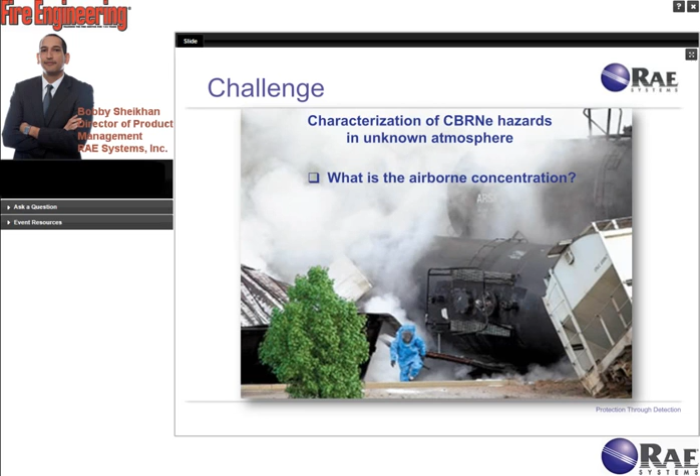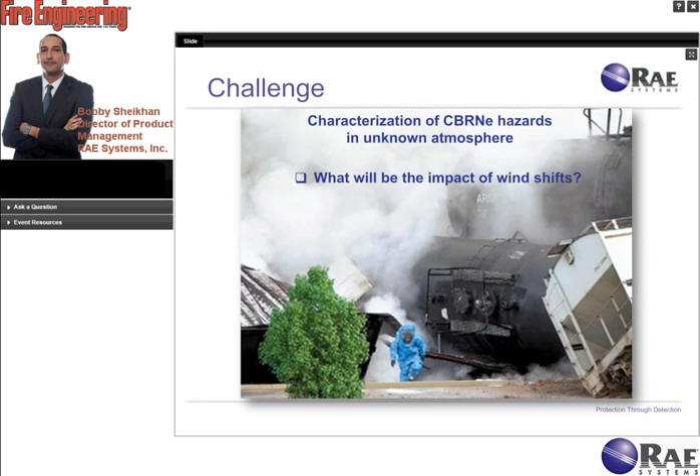So specifically, if we're dealing with, say, a chemical threat, the rate at which the hazard is being released, as well as the airborne concentration in the air, coupled with any sort of meteorological information such as wind speed and wind direction, are really valuable input points to have in order to be able to calculate the total impact that this plume can have and start to answer some of the other difficult questions such as, where is this actual threat heading from here on? So looking ahead, what are we really dealing with here?

Now, in order to coordinate an effective response plan, really some of the decisions that need to be made are how best to utilize the typically limited resources that might be available. So in other words, where do we actually send our folks? How do we suit them up in terms of personal protective equipment? What type of gas detection or radiation identification type equipment do we want to deploy?

So an accurate characterization of the actual hazards in the atmosphere is really required in order to determine such things as what is the best location to send responders, how to gear them up and how to equip them.

And really a key, what can be a big challenge if it's a large-scale enough incident, is how do you deal with the tasks we've talked about so far, as well as attempting to coordinate merging with mutual aid response type teams. So that can include the sharing and integration of gas, radiation or chemical warfare sensing and detection monitors, as well as just the logistics of how do you coordinate that type of response.

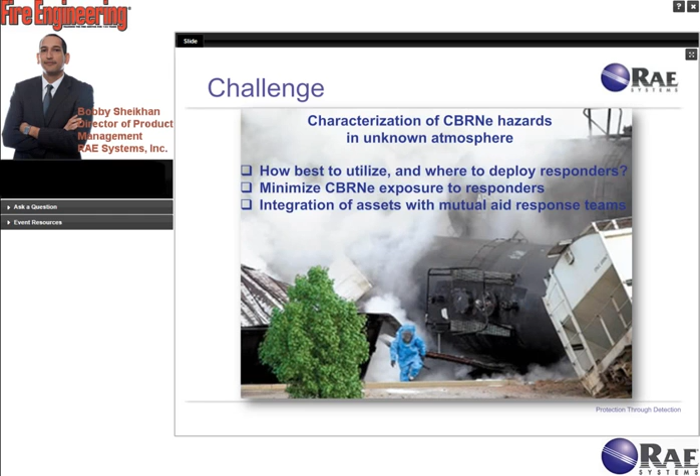And ultimately, all these efforts and questions are geared towards the primary mission goals of, one, stopping the threat, and protecting the public and the community from impact. So as part of the protection effort, decisions such as who potentially needs to be sheltered in place, or which roads may need to be closed, are things that must be decided.

And such difficult decisions do have impact on the effectiveness of the response strategy and certainly can pose potential liability both for the response team themselves and the public, in terms of obviously health dangers, but as well as any sort of liability issues or monetary considerations that can come about as a result of over-responding, if you will. So in other words, how do we know how large of a population to shelter in place, or which areas, which businesses are going to be impacted? These all add to the complexity of the response effort.

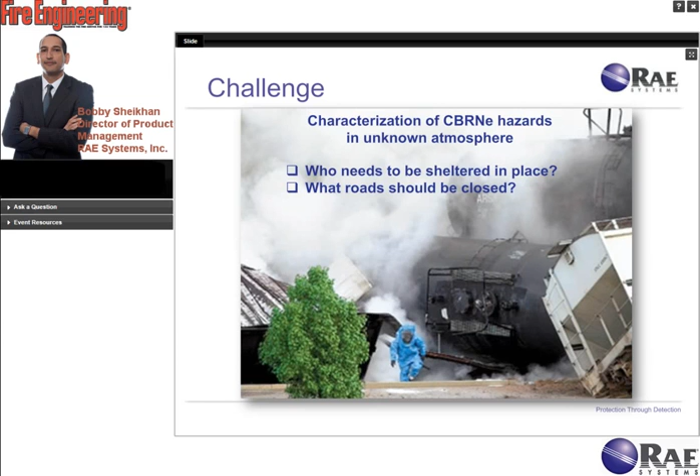So if we look at the more traditional response plan, specifically the detection tools we might use to characterize what we're actually dealing with in the atmosphere, typically you would have a pair of responders that you would send into what we'll call the hot zone with a backup team, and depending on the size of the event, it can certainly be larger than that.

But it was basically based on the premise of equipping one or several individuals with monitoring equipment, with some sort of communication device, to be able to start to get a view of what's going on over a fairly large area. And there are some inherent shortcomings with this type of approach, and we've listed a few of them here, starting with the ability to identify the threat that we're dealing with.

So, these days a lot of monitors have become quite sophisticated in terms of the ability to equip them with a variety of sensors, which has its own potential drawbacks to consider. But ultimately, there is a limitation to how much we can put in one particular box. So that, coupled with the fact that we have a limited number of folks that we could send out to perform sampling, and sampling that's really, if you look at it, a snapshot, right? So at that particular moment in time, at that particular location.

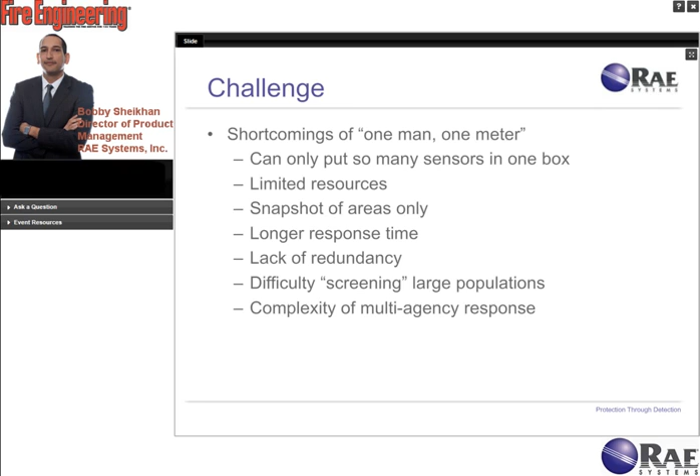So in terms of looking at the solution, really the integration of what have become fairly robust, field-proven wireless networks with both portable and what I would call transportable detection monitors, coupled with sophisticated software running on advanced computers these days, really allows you more of a system approach where a network of sensors provides real-time data over a wide area. So again, as opposed to getting snapshots of particular locations, we can now really begin to look in real time at multiple locations. And there are some inherent benefits of being able to do that.

What we can start to do now is, with the ability to couple these sensors with GPS readings, as an example, we can start to overlay that information on a local map and/or an image of a facility potentially. So what this really allows us to do is get a look into the hot zone or the threat zone remotely, and that provides some enhancements in terms of looking at multiple locations, providing a second set of eyes to the folks that are actually within that threat zone, coupled with other capabilities when we start talking about decision support software.

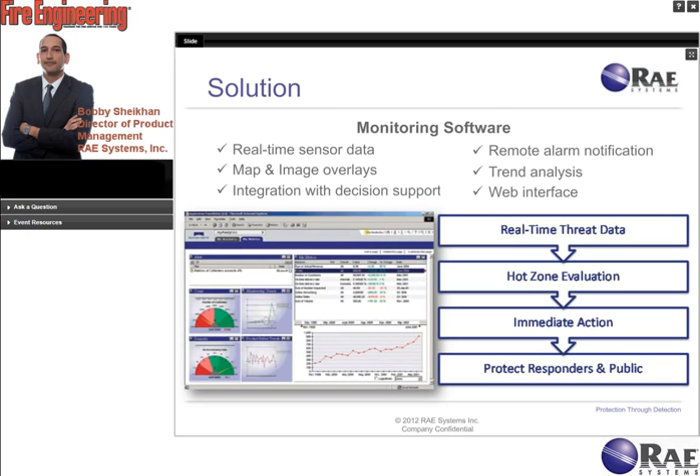So if we start to look at the different major components of this type of system, on the last slide we really discussed more the software side or the command host side where we bring in all this information. If we look at the detector side or the monitoring sensor side of the system, again, that's one of the benefits of being able to use a system approach where we network these different types of technologies together. So some examples include handheld monitors that can help us detect toxic industrial chemicals, chemical warfare agents, radiation, and we're not just limited to sensors for the detection of threats that may be airborne.

What we can do now is really start to couple this detection information with other sensing technology, such as meteorological, again, to give us things like wind speed, wind direction, things like physiological, where we can equip the responders with sensors that will measure their heart rate, heartbeat, posture, and things like that. Coupled with man-down sensors within the monitors, it really does provide an increased safety net or a second layer of safety at the command center in terms of what's really going on with the responders and the sensors within the threat area that they are covering.

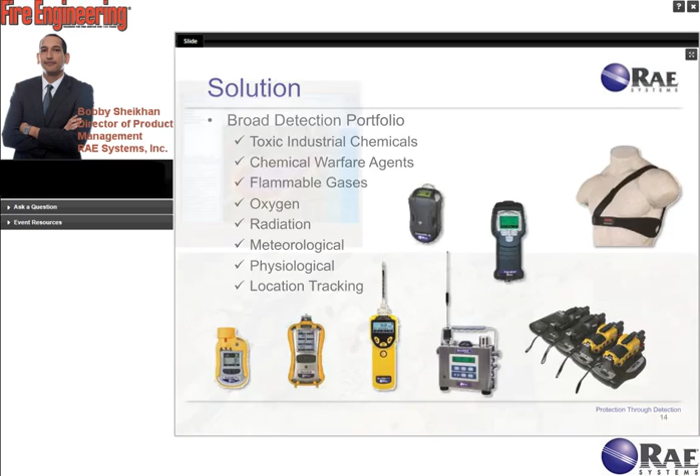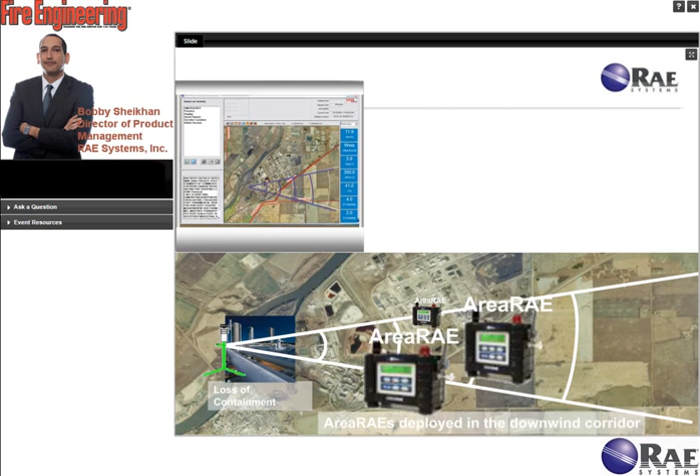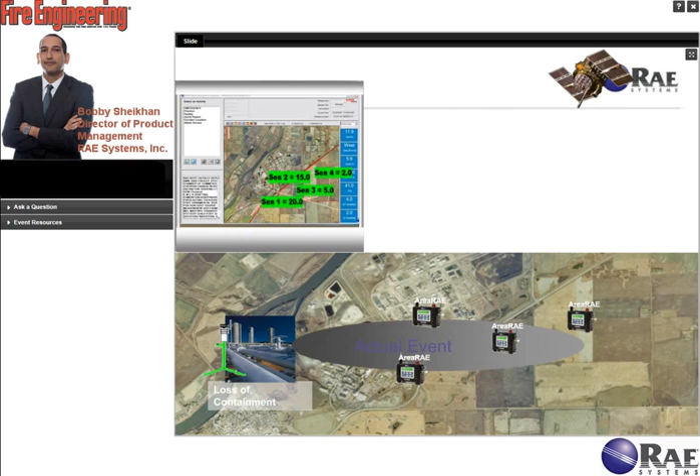Now, if we were to take a look at what a deployment scenario might look like, and again, really, if you look at a lot of the traditional hazmat response type tools, they are appropriate for what we might tag more as CBRNE or terrorist type incidents, because ultimately a lot of the threats remain the same and the response tools will be the same. So in this case, we're looking at some sort of loss of containment. Again, that could be both accidental or ill-intended, and we have some sort of chemical release into the atmosphere. And so one of the first steps was really to deploy the portable MET station, and that gives us a general area that could be affected.

And now what we can do is deploy a set of wireless monitors into that area. And because it is measured in real time, it is basically going to do an advanced back calculation and give us a fairly accurate assessment of how much of this particular threat had to have been released initially to generate that type of plume. And we get a nice color-coded plume over a mapping area, including some facilities that may be at risk. And this can be both real-time and forward-looking in terms of where this is heading.

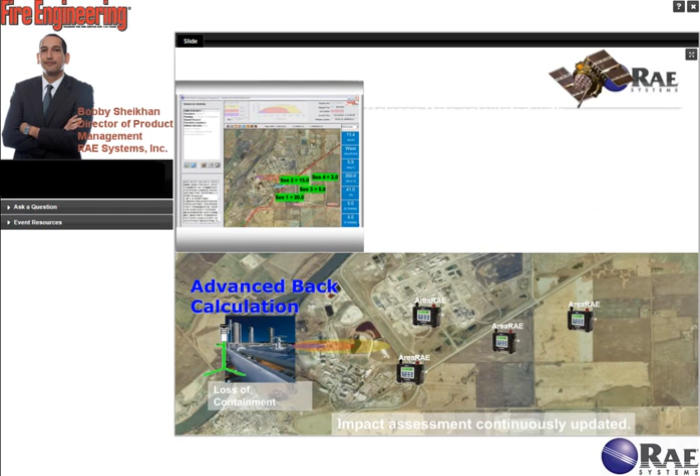And obviously, as the event transpires, you can see the plume starts to get smaller because, let's say in this case, we were able to contain the threat. And because the monitors are measuring that all in real time, it's going to continuously correct the plume. So again, going back to one of the benefits we discussed, which is the ability to take these real-time sensor readings and feed them into other systems, as opposed to a traditional plume model, at the end of the day this is still a model, but the difference is that we are measuring in real time and constantly doing a check and saying, do these readings make sense with what the model is actually predicting?

And then if we were to drill down one layer further, just to give you a sampling of what that might look like. Again, in this case, what we're looking at is a plume that's been generated. To the right there, we have our real-time weather and sensor data information. At the top pane, it's displaying to us what the chemical threat of concern is. In this case, we're dealing with chlorine.

It includes a graph of the release in terms of both height and distance. And down at the bottom left, we're looking at potential impact zones. So that could be homes, schools, different residential and commercial buildings that are within that plume. And because all the information is within one area, now you can really start to generate automated reports. You can bring up graphs showing indoor versus outdoor concentration for a particular building.

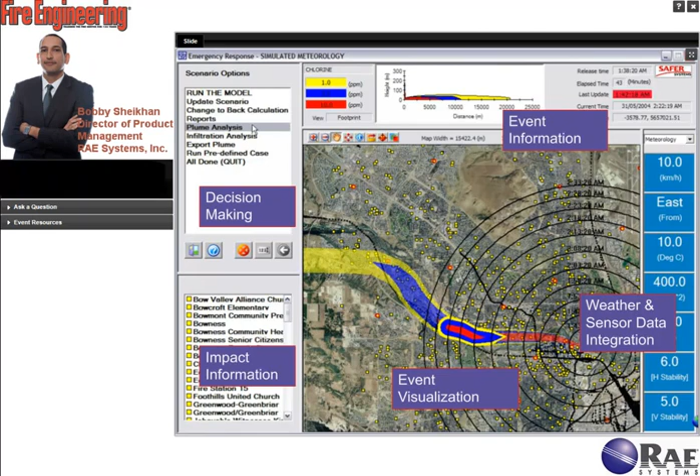Taking a look, just to give you a sampling of some of the specific applications where we've seen wireless sensing detection used over the years. Obviously, we talked about general hazmat type response. That could be something as typical as a tanker rolled over on the highway, to more involved events. It can certainly be public venue protection. I gave you some samples earlier where it could be a lot of sporting type events. It could be inaugurations for political parties. Essentially anytime you can have a large gathering indoors or outdoors of folks.

These types of systems certainly have a lot of benefits in terms of rapid deployment, the ability to move them fairly easily, and they can be a valuable tool in terms of planning protection for these types of events. And because of a lot of the similar characteristics, they can also be used in more permanent type deployments. So that could be at ports, or at military facilities or installations where the system is just left up and running, say, as a fence line type monitoring system.

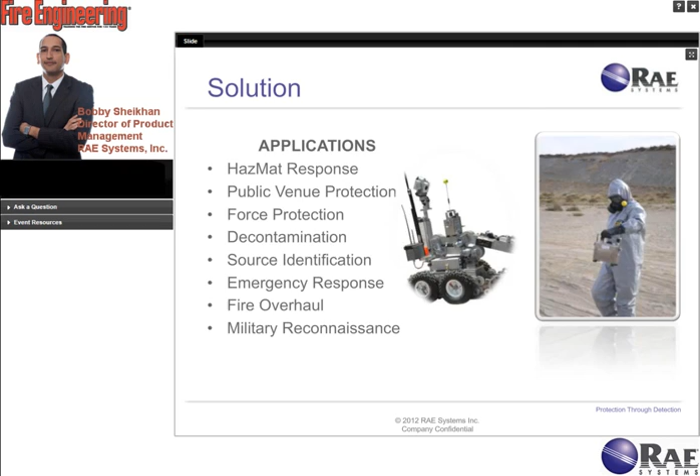So if we were to summarize some of the key benefits of these types of systems: the ability to really see in the hot zone, which can be an effective tool to provide early warning and enable quicker response, is certainly a big key benefit. Also, the ability to overlap different sensors to speciate or really confirm what we're dealing with. We have an example coming up to show that a bit more, as well as an example of the benefits of this type of system approach when we're trying to merge response efforts with other folks.

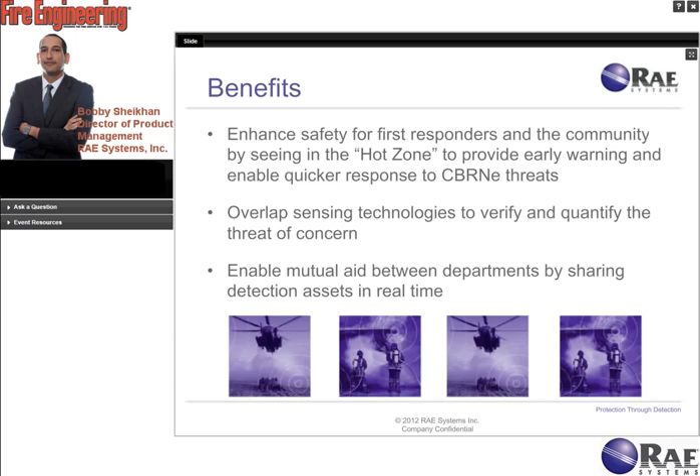So in this case, we're looking at representing this functionality or capability of overlapping sensors by using circles. Essentially each circle represents the range seen by a particular sensor, and by being able to overlay these different sensing technologies, we're able to pinpoint and zoom and find out what we're actually dealing with. Now certainly this can be done without the use of a real-time monitoring system, but the ability to have that information real-time makes this a lot easier to do and a lot more effective.

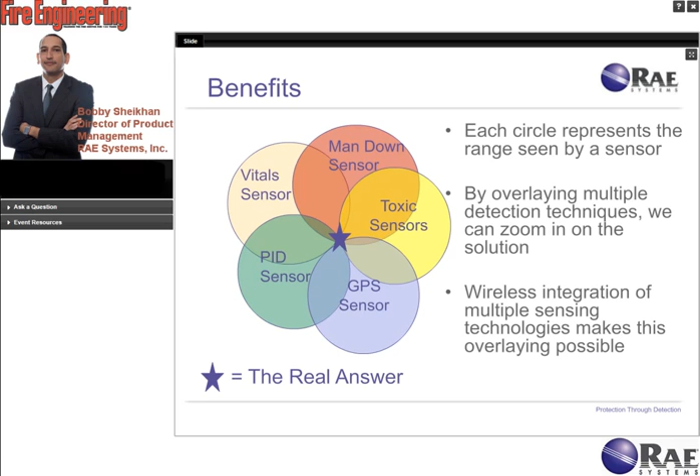So if we were to look at a specific example, here we have, say, toxic sensors, an electrochemical sensor specifically designed for ammonia. Most of the sensors max out around 200 parts per million, so in this case we know we have at least 200 parts per million. It certainly could be more.

We do have a PID sensor, which we know actually shows good response to ammonia. It's currently showing 25 parts per million, but that's on an isobutylene scale because that's what the monitor was calibrated on. If we were fairly confident that it was ammonia we were dealing with, we can go ahead and scale the readings and actually apply a correction factor, which in this case happens to be 9.7. So we would know that between the toxic sensor and the PID sensor, there's a good bet that we might have between 200 to 250 parts per million of ammonia.

Now there are other physical clues such as smell and different things which have their own trade-offs that can be looked at. But in this case, we know that the chemical monitor also has a man-down sensor, which is currently in alarm, indicating that the monitor and potentially the operator, if they have the monitor on them, have not moved in at least 90 seconds. And we've coupled this with other data coming from a physiological monitor that shows that the breath rate and the heart rate are below normal, what they should be.

So really, you can start to see the point here is that by overlapping different technologies, it really gives us a lot more information than we were able to get from, say, just one sensor from a particular monitor. And here we could potentially even do other things, or it could be something as simple as colorimetric tubes or IMS technology. You can certainly start to really speciate and pinpoint the threat that you're dealing with this capability of overlapping technologies.

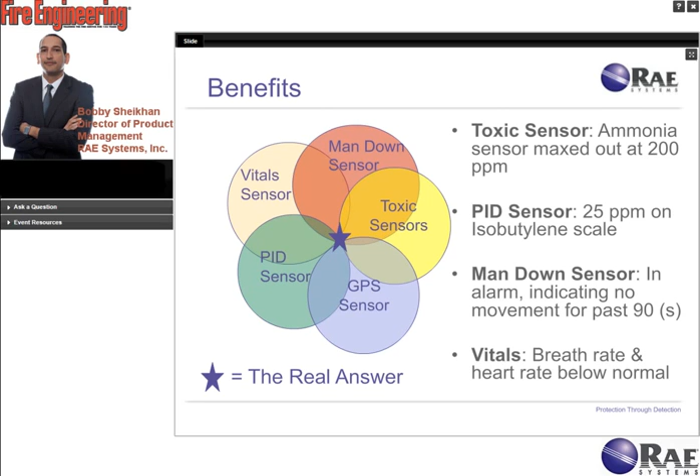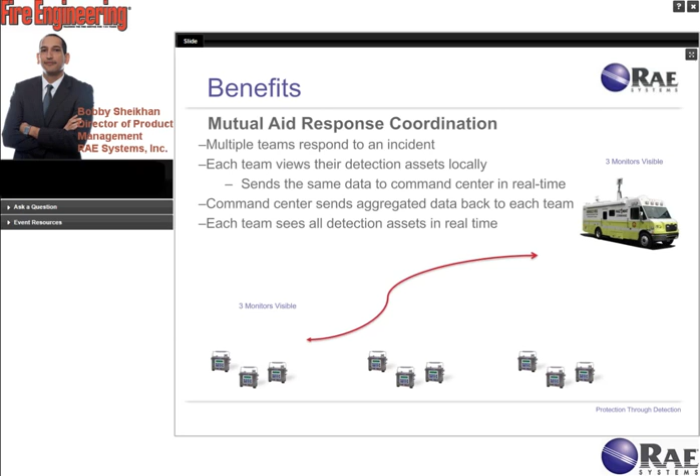And real quick, just taking a look at the mutual aid response example that we were talking about. In this case, what we're showing is the ability, if you had an incident, you might have the first team show up with 3 monitors. They're able to view their sensor information real time, but they're also able to push that information back to a command center. And as the different teams come online, we can go ahead and do the same thing. So not only are we locally viewing our monitors, but we're able to coordinate that effort back to another particular view.

And even from there, if we wanted to, we could take that system information. Now, you do have to have some way of accessing, in this case, the Internet. That could be Wi-Fi, a cellular card. It could be a variety of ways. But we can certainly take that information and push it to as many other locations as we wanted to.

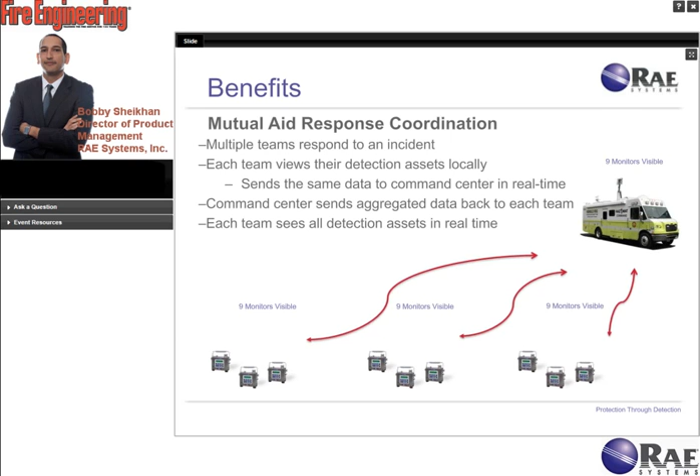Some of the things to consider if evaluating these types of systems. Certainly, as much as possible, if you can find proven wireless systems, things that have actually worked in emergency type response scenarios, that is preferred. A full detection portfolio in terms of how many different types of sensing technologies can actually be integrated onto that platform. Is it coming from somebody who's assembling different components from 5, 6 different companies, or is it a manufacturer that is capable of providing both the radios, the sensors, and different types of solutions?

Certainly, ease of use is a big part. There's a lot of wonderful tools out there, but if they're not easy to use, they may not be practical. And more and more an open platform, so the ability to take sensor information from different types of monitors, the ability to take the system information and integrate it with other systems, that is definitely a big key capability, and one that plays into the scalability of the system. Can the system grow with your needs? Certainly want to look at things like total cost of ownership, so not just the acquisition cost, but what is it going to cost to maintain the equipment over the life of the system.

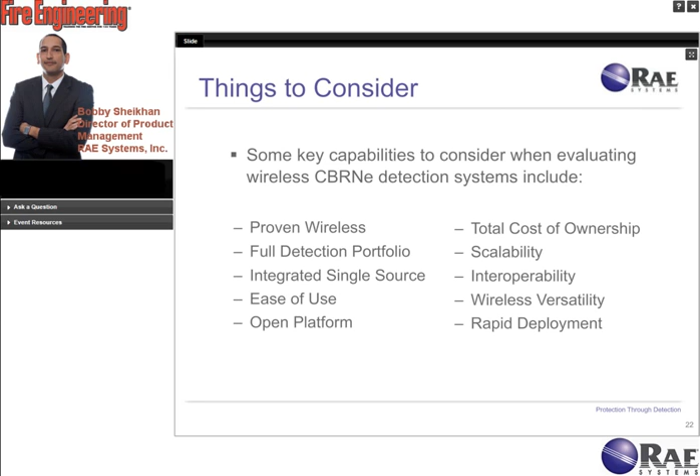Interoperability: there are quite a few existing wireless systems in the field, so if you're going to be integrating with those types of folks, that would be a key benefit. Versatility of the wireless system: again, it's outside the scope of this particular presentation, but there are a lot of different types of wireless radio technologies, and they do have different trade-offs, so that's an area you certainly want to look at. And again, time is a key thing that we must be conscious of, so rapid deployment is another key thing to look at.

And in summary, I'd like to say that wireless CBRNE detection systems really do enable quicker characterization of the atmosphere. They do have a lot of benefits. They do not replace people, or a lot of traditional methods, but they certainly can be a key addition, which will allow you to know what's going on in the hot zone, allow you to track responders in real time,

enable sending help quicker to help both responders and the public, and really allow the folks that are tasked with addressing the situation to focus on their primary job, with the added benefit that you do have a second set of eyes on those monitor readings, as well as coordinating with other response teams or offsite experts. And really, ultimately, what we're talking about is the ability to know now, because the decisions that you make do affect a lot of different folks.

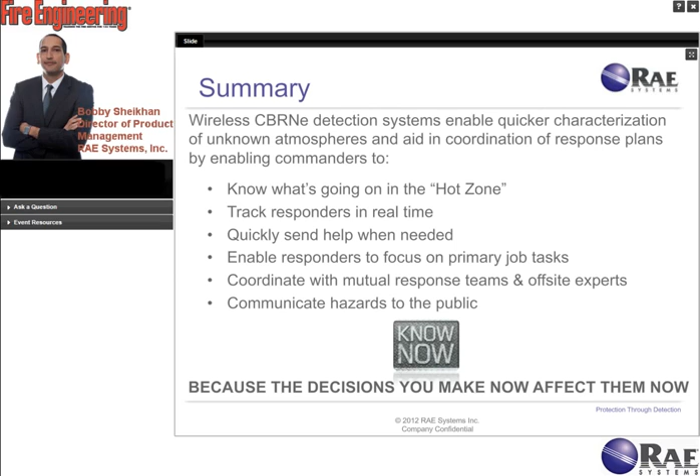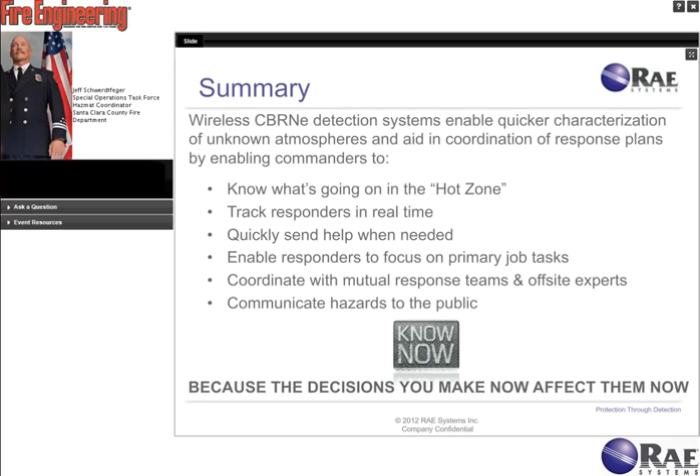As far as the Santa Clara County Fire Department goes, we are faced with several different challenges, being in the heart of Silicon Valley with several large manufacturers of electronic goods. The threat is real as far as terrorism goes, as well as day-to-day hazmat incidents. We cover quite a large area, 114.5 square miles in our first-in jurisdiction, as well as the entire state of California. We're an OES Type 1 hazardous materials response team certified by the state.

In order for us to maintain that certification, we have to keep 7 personnel available 24 hours a day, 7 days a week. And those 7 personnel have to be trained up to the level of hazmat specialist with weapons of mass destruction certification as well. We do that, and on top of that, we also have an additional 7 firefighters and company officers that are trained to that level and/or to the level of hazardous materials technician through the state of California.

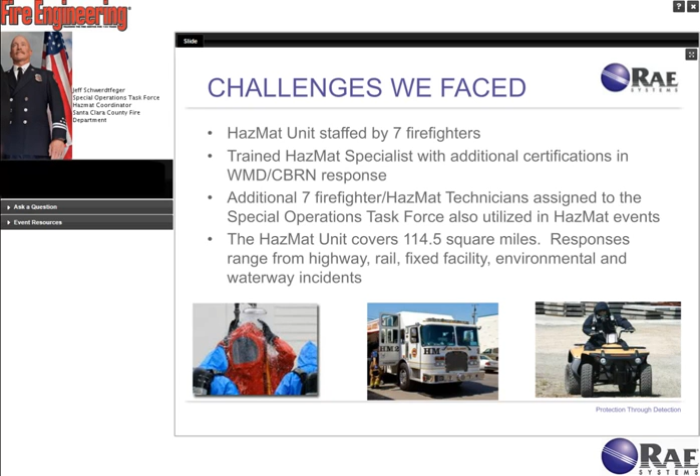And our hazmat unit does cover that 114.5 square miles. We do have additional resources available within our own jurisdiction. And on that unit itself, we have a variety of equipment that is required by the state for us being a Type 1 hazmat response team, and we also have additional equipment as well. As far as the selection process of the equipment that we purchased for the unit, we did have a resource list that we had to work off of, and the equipment we purchased was based off of that resource list provided by the state. However, we did have some options in purchasing equipment, and in researching the equipment that we purchased for our department and our response unit.

Some of the criteria that we used was obviously cost effectiveness in this time of budgetary restraint. That is obviously going to be one of the primary concerns that we're looking at, how much the equipment is going to cost. And then the functionality of that equipment. Is it going to be capable of taking care of our needs? The scalability; Bobby spoke to that quite a bit as far as scalability with other units as well. Maintenance: the ease of maintenance, and also the cost of maintenance.

It's something that a lot of jurisdictions don't really think about once they purchase the equipment. They feel that once they purchase the equipment, they put it in service, and unless they use it, it doesn't need to be maintained. Unfortunately, that's not the case. Maintenance is a large part of what we actually do on a day-to-day basis. We have several dozen monitors on our units throughout the department that we need to maintain, and that's not only daily maintenance but monthly maintenance and annual maintenance.

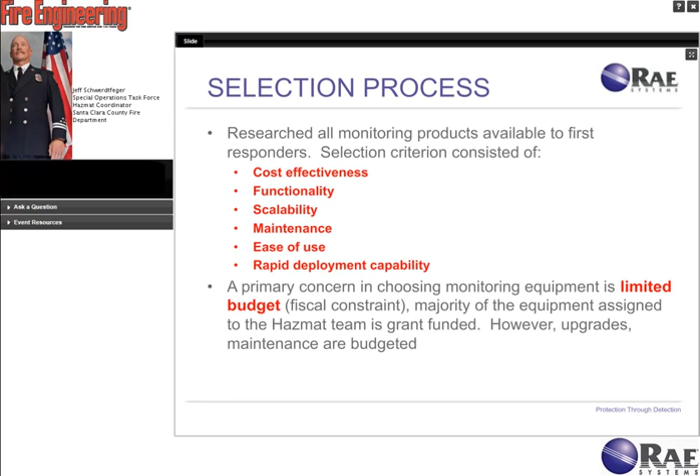And then also another important factor was rapid deployment capabilities. Getting on scene and setting up in a timely manner is very important to first responders, not only protecting ourselves but also our assets and also the general population which we're out there to protect. And once again, getting back to the primary concern when choosing monitoring equipment is limited budget. It's our fiscal constraints. The majority of the equipment that is assigned to our hazmat team is grant funded. However, maintenance upgrades have to come out of our own general budget. It's not covered by the grants themselves.

Okay, and then the solution, the application as far as the equipment that we chose and that we use on a daily basis. Probably one of the most important things that we have to consider when we're purchasing and using these monitors is LEL and VOCs. That's the most dangerous component to any hazmat call that we'll be responding to. And as far as in a flammable environment, the 4-gas monitors that we chose, we like to set them up in basically the 4 corners of the event, keeping our command and control units outside of obviously the hot zone, more into the support zone. And when we do use these units, we set them up, like I said, in the 4 corners. They're equipped with 4-gas technology as well as gamma and also GPS. And with the software that we have back in the command and control unit, we can see in real time exactly what each one of those monitors are experiencing.

We also hook up to that same software a weather pack, a weather station, which is also tied into the software, and it also runs in real time. So it's showing on an incident map the actual monitor locations and the monitor readings in real time, along with the weather in real time. And this is very important when you're going to develop a plume model, which we do in every large-scale event.

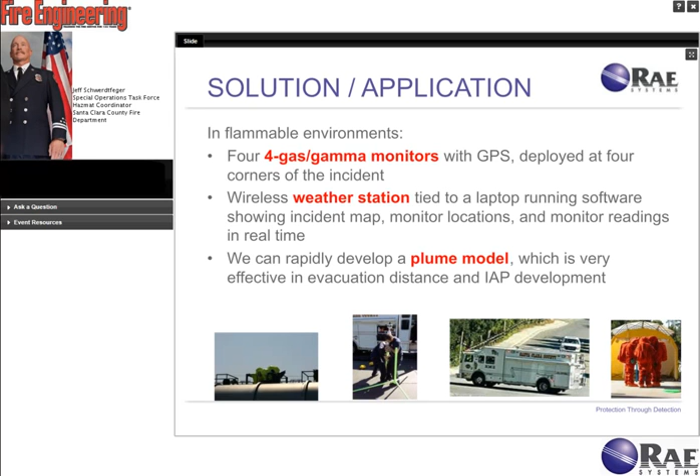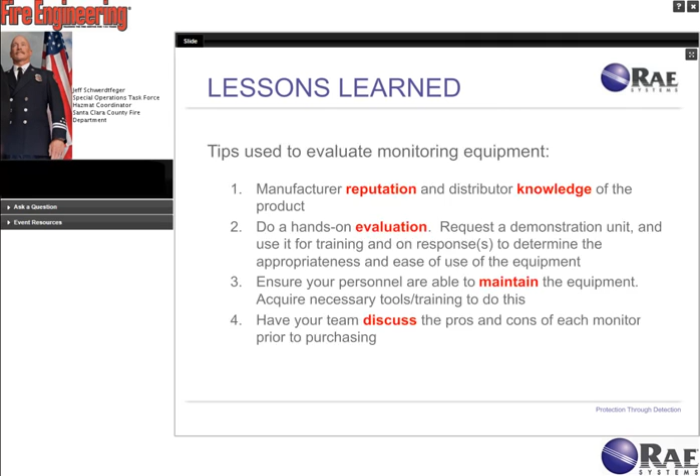And then once again, just a couple of recommendations. Purchase the appropriate equipment for your response model. Every jurisdiction is different. The demographics are different. The layout of the land is different. In our particular response area, like I said, we have several large manufacturers. Without mentioning too many, we have Apple, Google, a lot of electronic companies such as that. And then we also have several different potential areas for terrorism.

So based on all of our intelligence, in our response model, we purchase the appropriate equipment to respond to pretty much anything that we can come across, from your typical hazardous materials response all the way to a terrorist event. And train your personnel to use all of your equipment, and also make sure that they know the limitations of all the equipment. That obviously is key.

You don't want to get onto a scene and have to teach your personnel how to use the equipment then. This should be ongoing training as far as knowing your equipment, how to use it, the appropriateness for each one of the meters that you have, utilizing it in every different situation. And then also maintaining all your equipment to the state of readiness. And that, once again, is a very key factor.